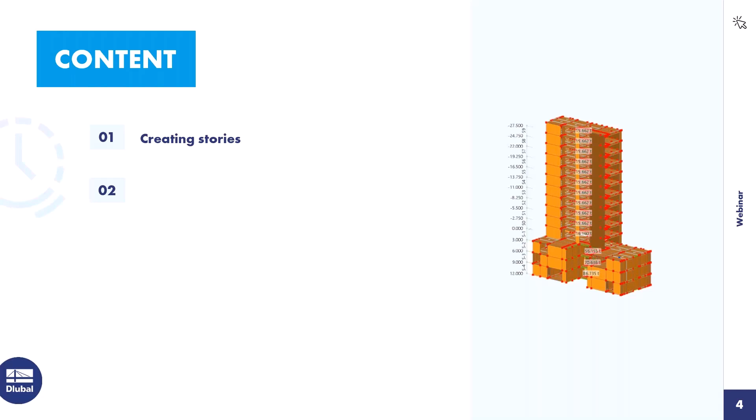Okay, thanks, Richard. What we are going to do today, I will tell a little bit about how to create stories with the building model add-on. I will show how to divide a 3D structure, the one you see here on the right side, into slabs and shear walls.

In order to understand how the building model add-on works, I will also explain comparing support reactions as load transfer. It's a little bit of a hidden function in RFEM 6, but in my opinion it is perfect for understanding how the building model add-on works.

Last but not least, I will show you the combination of the load transfer and the building model, because I chose this building that I'm using today since it's nearly perfect for showing the advantages of the building model add-on, but also of the support reactions as load transfer function, because it is smaller on the top.

So the nine stories here on top are smaller than the 3 stories at the bottom, and therefore it is recommended, in my opinion, it's the best way to analyze this bigger cantilever or balcony outside with this bigger area using 2D analysis. This way I can combine 3D and 2D calculations.

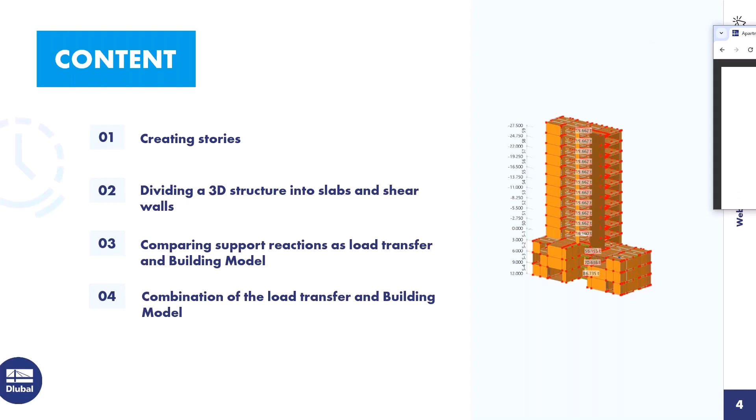Before I start to explain it via the software, via RFEM 6, I want to tell you just a few words about the project I'm using. You can find the project on our homepage. I did not 100% model it the same way for today, but it is adapted to this building.

It is in Amsterdam in the Netherlands, and as I mentioned, it is smaller for the 9 stories on top. It is completely made of CLT. That's already a difference to what I'm showing you today, because I'm combining it a little bit with concrete in order to have a hybrid structure.

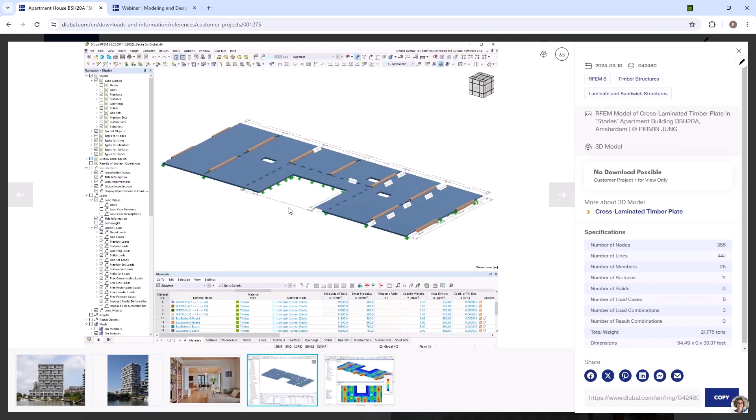Here you see the RFEM original model, and you will directly find out that the model I'm showing is a little bit different, but as I said, it's adapted to this. I used the same model in a previous webinar from the summer last year, from August last year.

You can also find it on our homepage under support learning webinars. It has the number 002965, and in that webinar I took a deeper look into the vertical load transfer and also the dimensioning with the add-on timber design. That is not today's topic.

Today's topic is only to look at how the building model works, how it works for stiffening the elements, how the load transfer works. This is the aim of today's webinar, and I hope I will be able to show that all to you. All right, now it's time to jump into the program. Maybe take a short look. Any questions so far? No, that's good.

So this is the structure. As I said, it's only the smaller part of the building, from story 4 to story 13, that has the complete height. This part of the building has a complete height of 27.5 meters. It has a length of 19 meters 20 and a complete width of 6 meters 70.

Maybe we also take a look at the ground floor just in order to understand how the building works. You probably did not watch the previous webinar, or not everybody watched the previous webinar. As I said, it is made of CLT. So I have 3 slabs of CLT attaching here.

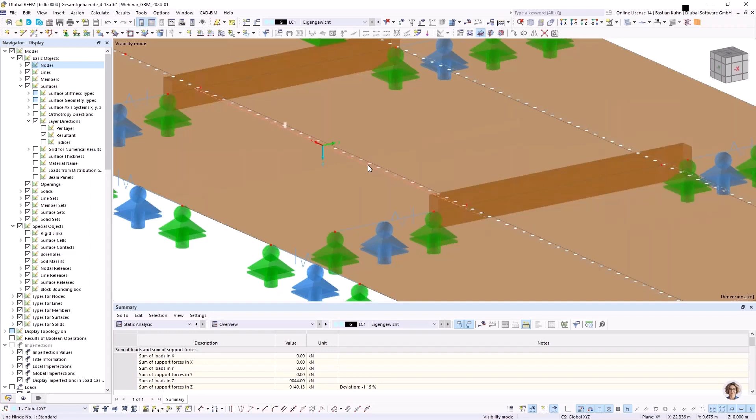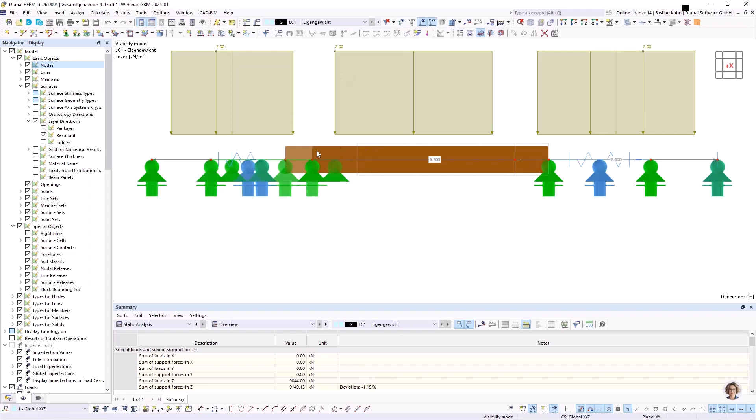And in order to regard the connection in between, I modeled here a line hinge, which is also in the original model that you can download in the customer project from our homepage, with the stiffness that I calculated, in order that the structure is not collapsing. Because obviously when we look in X direction, if you put a load in here and you have no support, no downstand beam, it's clear that this will collapse, because it's not moment stiff in this direction for this load behavior.

Okay, so this is the structure itself. You see that wherever there is a wall, there's a failing support underneath, which can only bear pressure contact, and I have a tie support at the end and the start of a wall, wherever a wall attaches. And here we have the concrete wall, which is quite stiffer, and here I have these walls attaching to it.

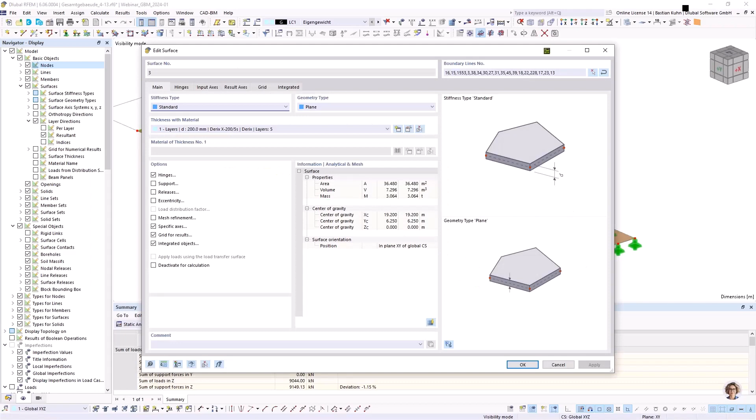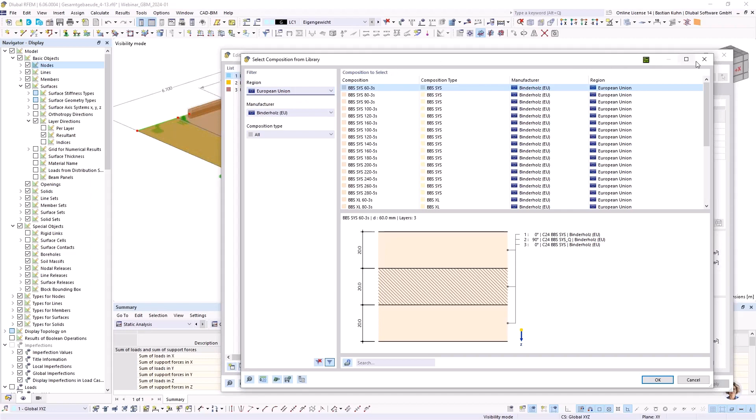Okay, just so that you know, the CLT plates that I used for the slabs I took from the database. And here in layers, I choose from a library. I chose Derix, but I could choose any other producer. It's possible to use producers from all over the world in here. And when we get to the walls, I will probably open that again, because there are some special settings that may make sense to introduce in here.

Okay, the load I showed already. Every story has a loading, in the first load case, of 2 kilonewtons per square meter, and I chose the wind load varying from the bottom to the top. It would have been possible, of course, to use our wind load generator, but I want it to be comparable with the 2D model that I want to show you afterwards. That's why I'm using the simplified approach.

Of course, if you go into the load wizard for wind load, such a building is always possible to calculate, and then you have 16 wind load cases in every direction, regarding eccentricity of the wind load. All these effects can be regarded, but it makes it harder to analyze the load transfer, and that's why I decided to use the simplified approach, which in my opinion is on the safe side and therefore good enough for this demo.

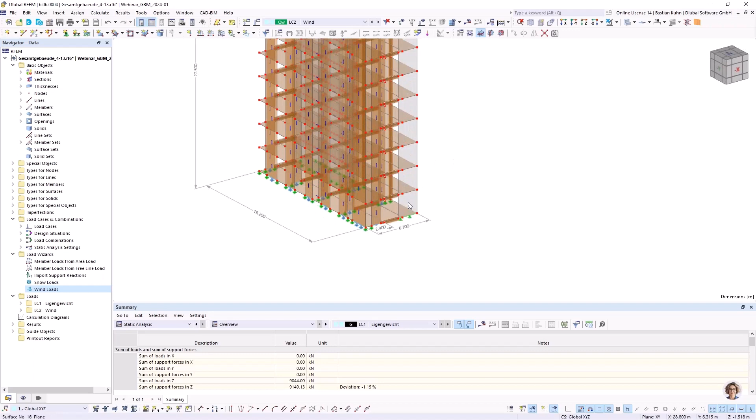Okay, I can switch off the load now, and let's take a look at the walls. Slabs we did. Maybe if I put this on and get rid of the nodes, it looks a little bit better. The stiffness direction: I have an option for the CLT plates to show the resulting stiffness, and usually for walls in CLT you always put the stiffness direction vertical, and on slabs you put it horizontal. That's what this blue check should tell you.

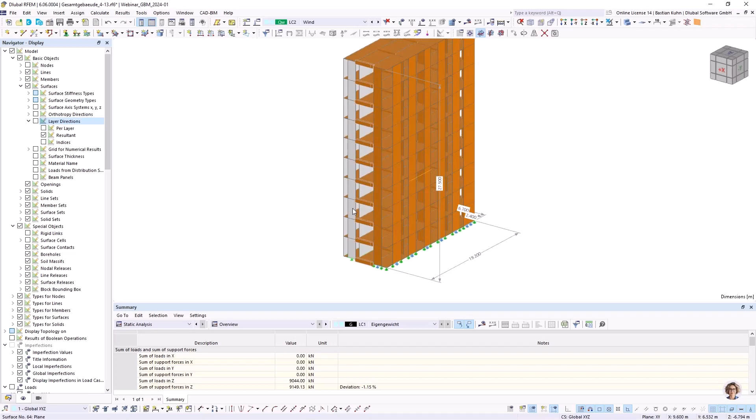Here is the already mentioned concrete wall, just to make it stiffer and to show you that it's not 100% related to timber. So the Building Model add-on is open for any material. And here is the staircase, and it's also concrete, and the walls are not connected to each other.

So the CLT walls, I said I want to mention the special function that you have in here. When you have mainly wall loading behavior, you should be aware to activate this design for failure of net sections. When we go to the library, there you will find an even better explanation of this. Maybe we can have a look at the, oh, it has to be on series calculation, stiffness. Let me take a look. I just want a simple picture.

Yeah, or maybe I'm not finding it. So maybe in stresses. Yeah, this one. You see, that's the torsional loading behavior, which is activated only if you have activated this check in here. So yeah, for the wall, that would be quite important.

And ongoing, the load transfer for the stiffness of a wall should, for CLT plates, always be reduced by a factor, in this case 0.69 for K88. And in such way, every wall is bearing force in here. That's the point. It would be possible to reduce stiffness or also to exclude walls from the load bearing, but in the model that I'm choosing in here, every wall is transferring the horizontal force from the wind from the top to the ground.

And when we get specific to concrete, if you want to regard cracking or loss of stiffness, there are several ways, a whole bunch of options, but one of the simpler approaches would be also to use stiffness modification. Okay, so this is the building.

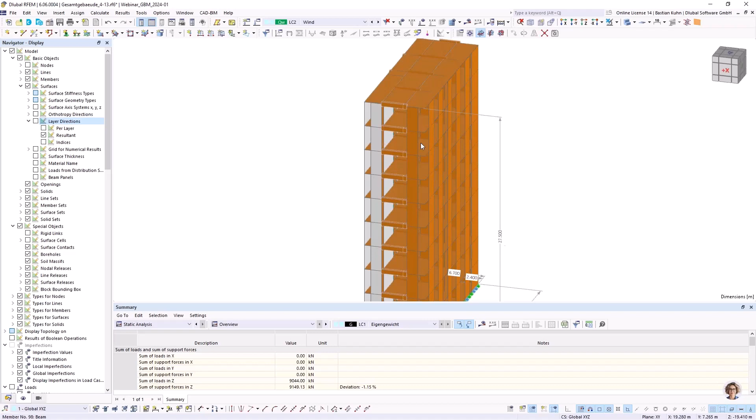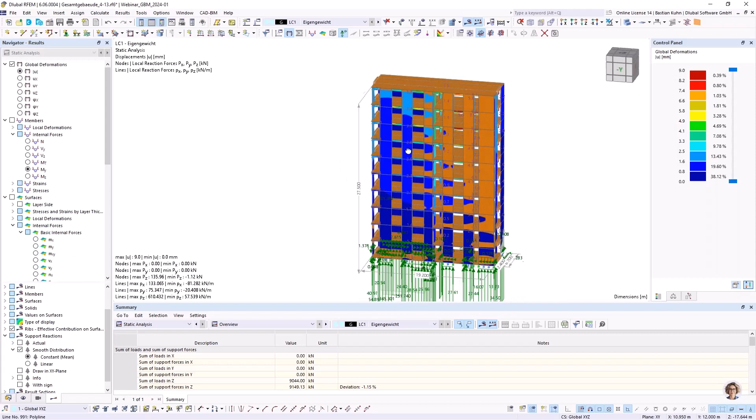In former times, before we had the building model add-on or this support reaction tool, customers always tried to calculate it this way. Let's say we have load case 1 with 2 kilonewtons per square meter, and we calculate it, and maybe we can remember just this little vertical force in here, 257. I can put it into my shortcuts also, so that we remember it afterwards.

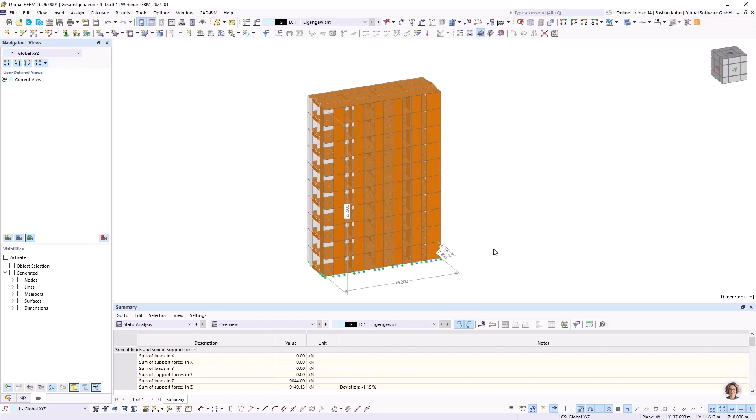But the problem always is when you calculate such a structure in this way, it is not the reality. In reality, such a structure would be assembled from the bottom to the top. And now you are calculating from the top to the bottom, which is, roughly said, wrong. And you should not do it, or you should find a way to regard settling of the structure during the assembly. And what if a stiffening element is failing or whatever? There are hundreds of things you should regard, and when you just calculate the whole building, it can become extremely wrong.

Okay, so now how would you do that? Of course, you can reduce stiffnesses, define line hinges and so on that I showed you in the slabs in the start. All these possibilities you have, but it makes the calculation very complicated. And this is actually where the building model comes in. So we will go to the building model, activate it, and change nothing else.

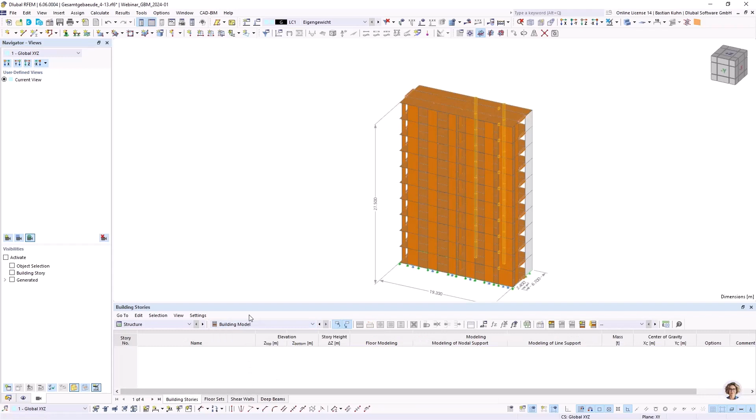And now that we did so, we have here in the structure, building model, 4 options to define building stories, floor sets, shear walls, and deep beams. We have the same functionality here in the data navigator, and as a first step we'll define the building stories. Okay, I will put on the rendering and activate rigid diaphragm. So the first story is already there.

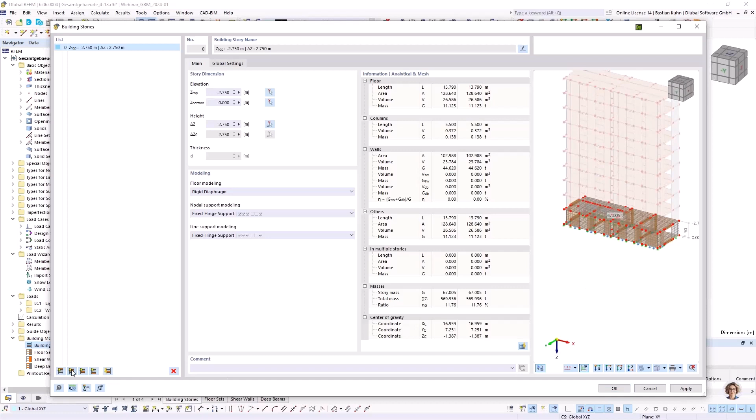You see, the software knows the first story is located from the origin 0 to minus 2.75. I can always choose any level elevation that I want. I get a mass. I also get a mass center. Obviously, where I have the concrete core, I have more mass, and that's why the mass center point is moved a little bit to the left side here, and afterwards it will also calculate a stiffness center of the complete structure. So okay, I will do this now for all the other stories. We have 10 stories in total, from story 4 to story 13. Here the top elevation.

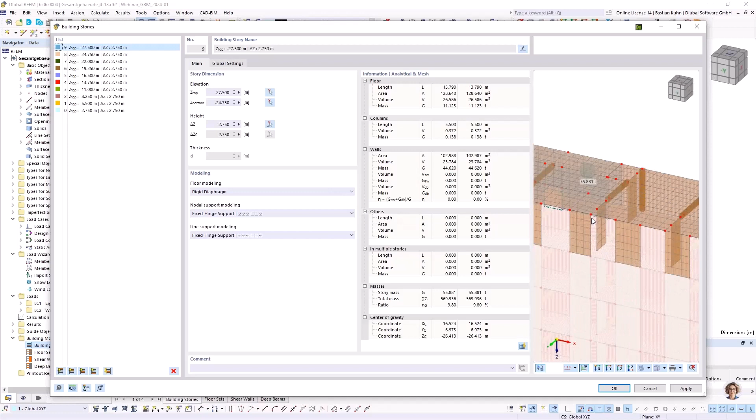And now for all these stories, in order to regard, for example, settling or creeping of the structure, it would be possible to define different nodal support modeling and different line support modeling. Right now, and also in the 3D calculation that I showed you at the start, every FE element has the stiffness of the material, E modulus, with the thickness. This gives you the vertical stiffness of it, E times A. And of course, as I said, this will not regard assembly effects.

And if you define an elastic wall hinge, for example, it will regard the vertical difference in stiffness, but also the horizontal stiffness of the wall. And that's actually what you defined whenever you calculated 2D models, in any software on the market, I think. And this is now possible to be regarded in this 3D model.

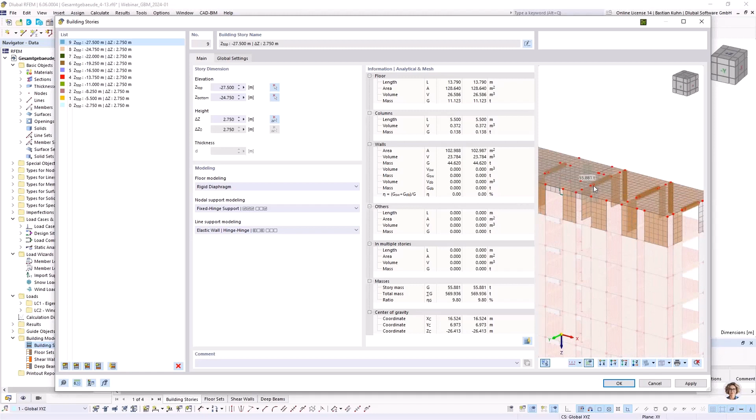So I would kind of call it 2.5D. That's what we're doing. We are calculating with the complete 3D building, but we're reducing it to 2D levels. We are dividing it into slabs and walls. This is what this add-on is doing.

All right. Global settings is something you can define whenever you want; story height modification is possible. Or if you say, because of my installation, I have openings that I maybe want to regard for the vertical load, but not for the horizontal, you can also ignore that. That may make sense and is a brand new function, which is why I'm showing it to you today.

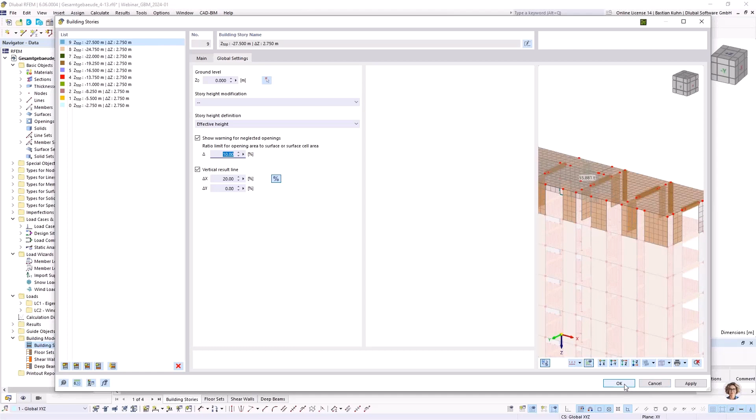Okay, now it's deleting the results. Of course, it's deleting the results. And apart from the mass, you see not really much in here. Not so much is happening. And you see, every story has its own mass. Of course, the ground story also has this bottom slab in here. That's why it has this higher weight. But that's actually it.

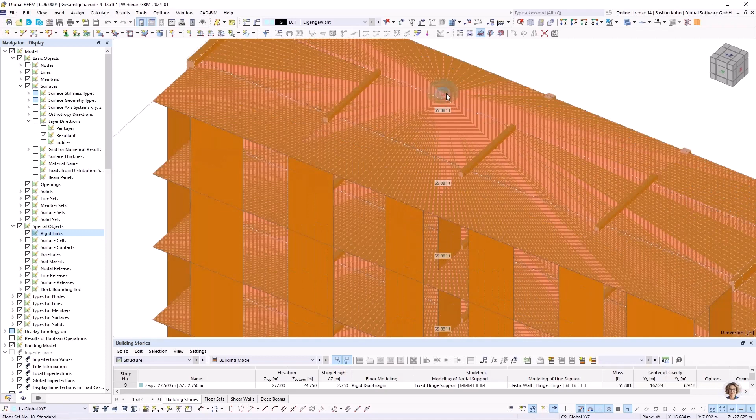But now when we activate the special object rigid links, I hope it gives you kind of an imagination of what this is doing. So you see from the gravity point, from the mass point of the structure, we have a connection to every FE node here. So in this way, we are calculating 3D, and as I mentioned, we have divided it into slabs and walls in here. I cannot go back; I should have shown it to you before.

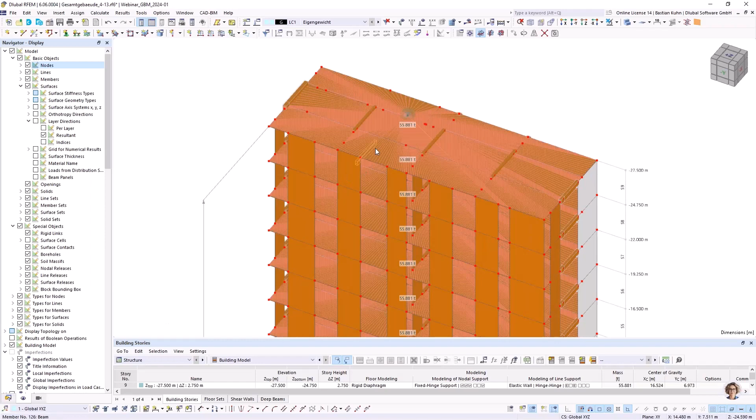But when we look at the ground floor, there the stiffness type of the slab is standard. And if you look at the stiffness type of the... wait, I will get rid of the rigid links again. If we look at the stiffness type of the surface in every higher story now, you see that it is transferred into a floor slab rigid diaphragm.

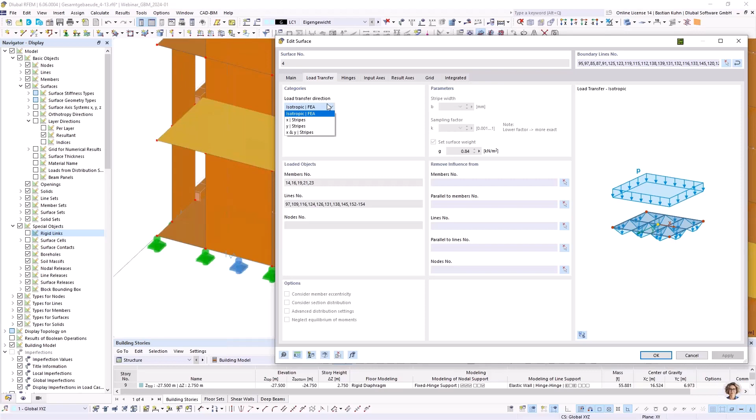So for the horizontal loading, for the wind load in our case, but also for earthquake, for anything that's working horizontally, 2D second order theory effects and so on, you will use this rigid diaphragm in here, just in the slab. And for the vertical force, we're using a load transfer. There's an option to choose isotropic and stripes. We will start with isotropic because I want to show you what effects you have when you choose stripes instead of isotropic.

Okay, so now this is done, and I would like to explain it only by the self-weight in here. Before we go to the wind load a little bit, I will also take a short look if there are remaining questions, but I'm pretty sure Richard will answer them all. Just opening them. Hold on.

Okay, so far nothing remained open, and you see now it has divided the force here and is calculating the first load case. And when this is done, when the force is divided and transferred to every story, it will do 3 calculations. That's quite an important step inside. Generating the mesh afterwards. I hope we can have it soon. Otherwise, we would take a look. Oh, wait, there it is at the 2D position.

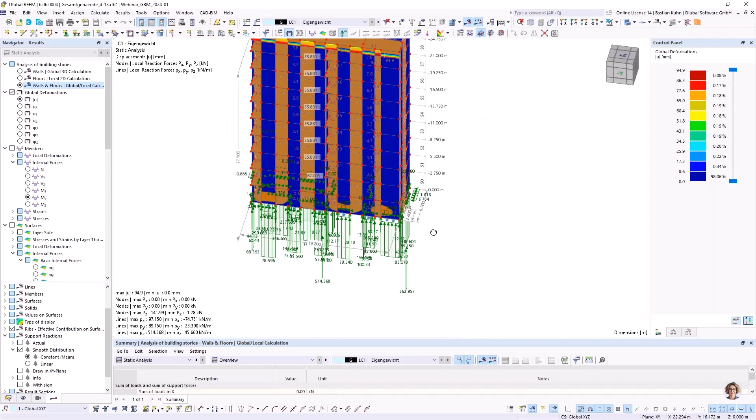So you see, there's a static analysis, the ordinary static analysis, a floor static, and a rigidity analysis of it. And if you have 3 calculations, it's clear that you also have 3 results for each load case, for each combination, for everything. So if you go in here, we have the results, but here you see that this is my ordinary calculation that I had before. Oops, maybe look at the side of it.

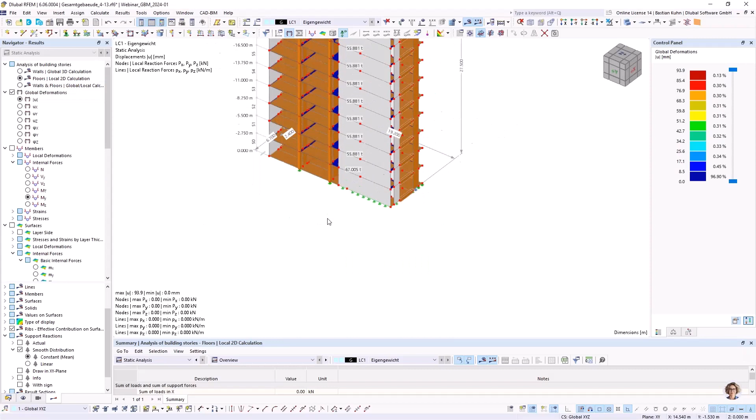So if we remain at the point that we put into the shortcut, you see that it is pretty much the same. Vertical load, it is 100% the same. But when we look at the floors in here, you do not have any vertical load, or any vertical support reaction. That's probably better said.

And here we have now only, oh, hold on. That is just a little bit strange because I did load it on every story. And to me, this does not look too good. Hold on. I think it's not connected inside here. Okay, there's a small problem that I'm facing that I don't understand. I had prepared the model before in a working version, and I would like to open this. I apologize for this because this is not the result that I would expect in here.

Okay, so here it is again. Sorry for this. And we now also have to wait again for this result. But as the mesh and the transferring of the load is already done, I suppose that I will receive better results in here.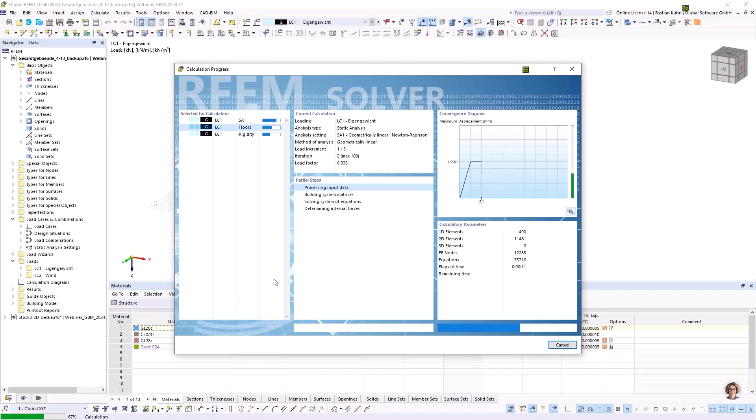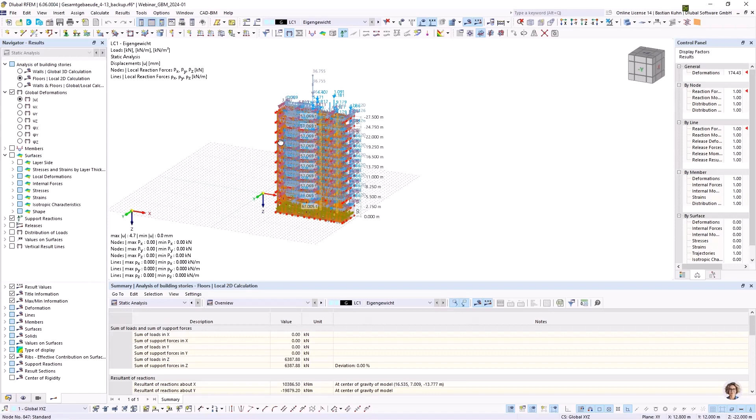There was no connection from the top points to the other ones, and so this was obviously not correct. I don't know, I will take a look at this later on. All right, so global deformation analysis. We look for the floors and hope that this is now better in here. Yeah, it looks way better. Yeah, perfect. That's actually what I wanted.

So you see now that I'm looking for the floors, you only have here, for the first load case, deformation in the floors and no deformation in the walls. The walls are in this global 3D calculation in here. And we will take a look at the walls in load case 2 afterwards. But right now we will take a look at the floors.

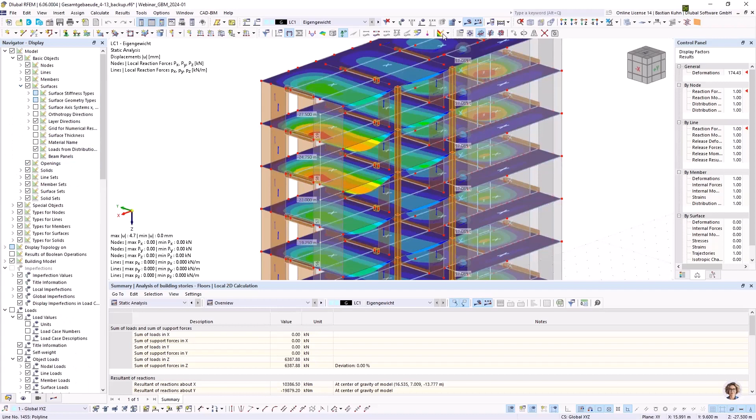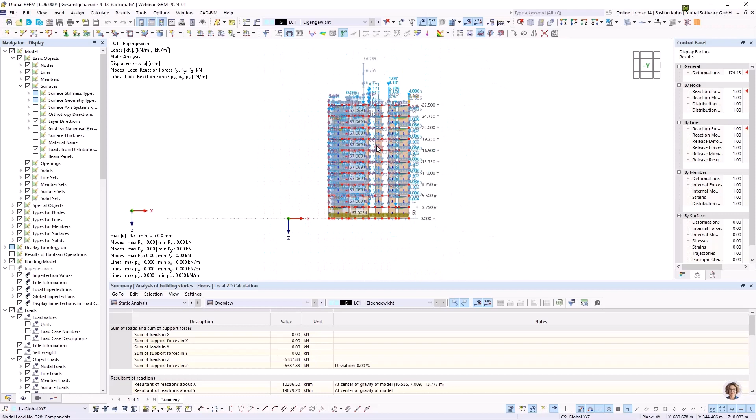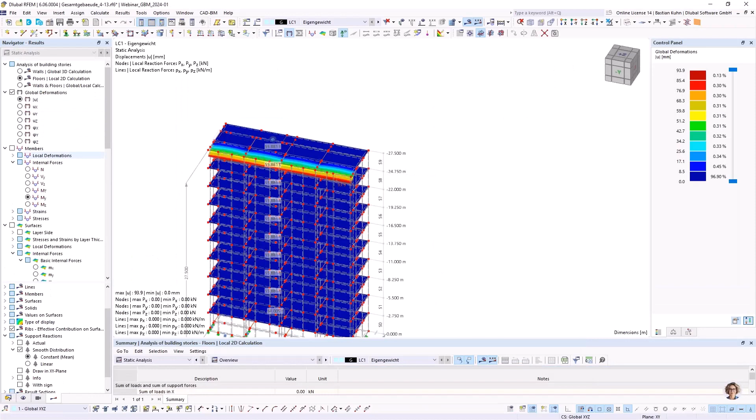All right, right here. Change these 30 surfaces and go back to the standard isotropic FEA stuff, and I will calculate only load case 1. Gives me time to take a look what the reason was that this is looking so strange. Maybe if I take a look into this, but this is all correct.

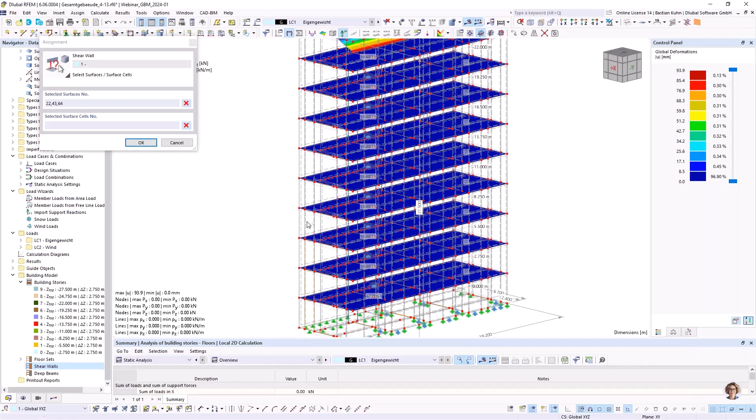And maybe I could also activate shear walls and deep beams. It's a function that is perfect for analyzing results, and maybe then it's connecting it correctly. Just to try for now till the calculation runs in the other model. Hold on. Okay. This is something you could use for directly defining reinforcement in here and also generating result sections. I will just show this to you on this shear wall in here.

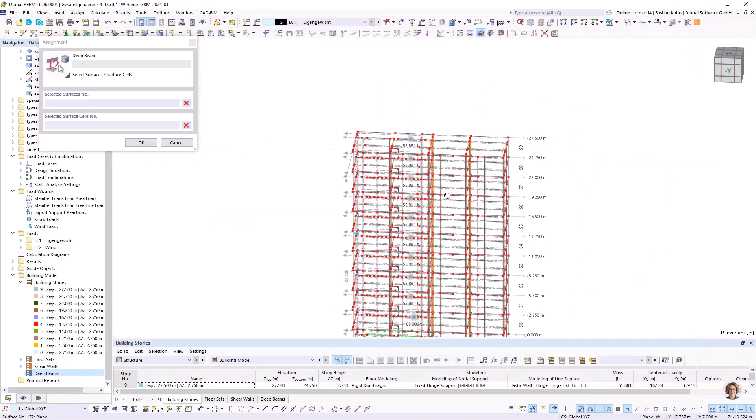All right, definitely good to delete the results here. And I also will define a deep beam where I have the opening of the building in here, where the staircase is. Therefore, I have to activate the surface sets because this would be good to be used by surface sets. So we go to surface sets, and we were using this here, and this can now be seen as a downstand beam.

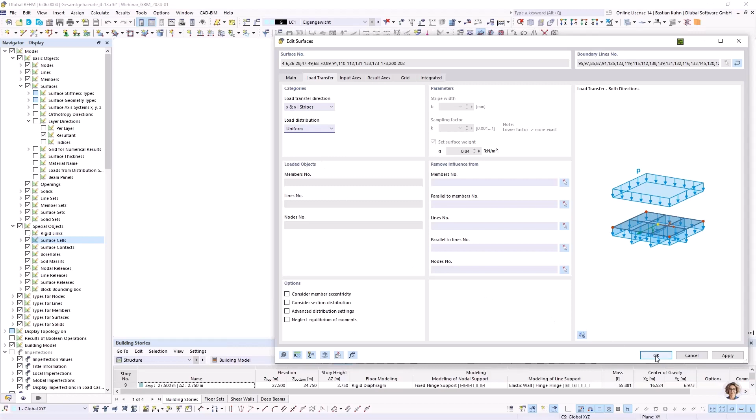All right, say okay, and also maybe generate a result section. Say okay, and maybe also use this function in here to use load transfer X and Y stripes right now. And here you see that's what I chose before in the other model that I showed you, it's possible to use uniform load distribution. And when it's not uniform, we can take a look now at the other models.

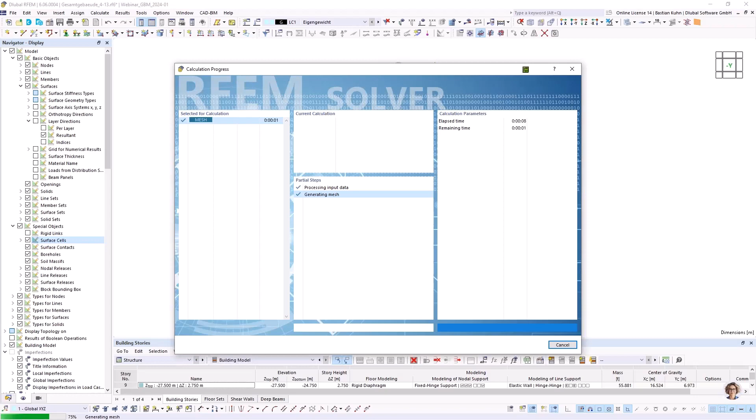I apologize, it's maybe a little bit confusing, because I'm now opening two instances of RFEM, which was actually not the plan, but is how it is now. Okay, in this other model, we are transferring also the mesh and have also already the result in here.

So this pretty much looks the same, but when we activate now the load, you can see it is now taken from the top slab to the slab underneath it. And you see now here, it is varying, which is not what we want. We want to have it constant here for our static analysis. It's what you always choose when you take a look at the support reactions. And here you also take them constant.

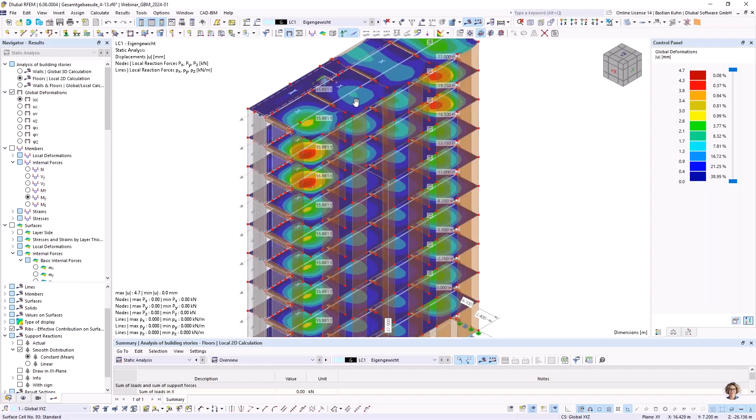Okay, let's just for comparison open this other one in here. Yeah, that looks now also better. So we can proceed with this. I don't know what went wrong there in the other model, but now it looks good, and we can go on with this. Okay, and in here we say now surface load from distribution activated. Get rid of the surface load.

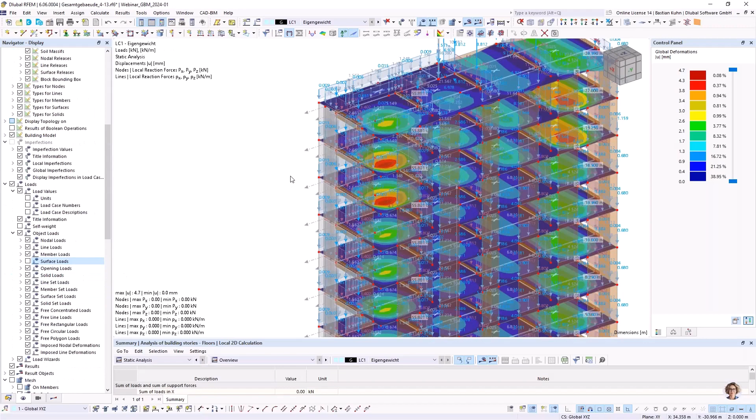And we are in load case 1, and you see it has here now a constant value of 6.8. Okay, I want to open now a second instance where I want to show you how vertical load transfer works. Doing this, we will calculate also the wind load in here and jump now to the other model.

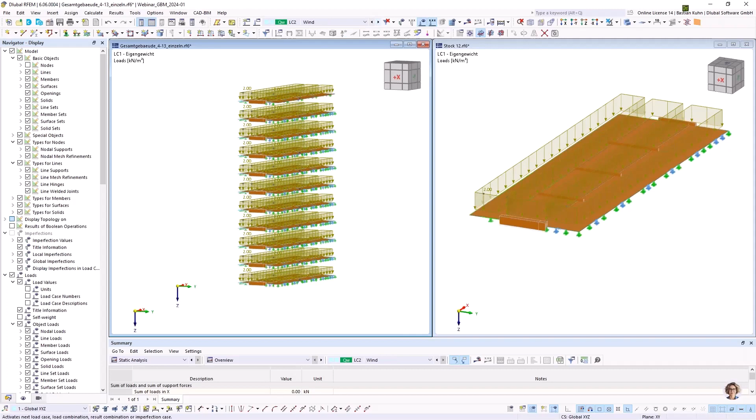This is a 2D model. It may not look like a 2D model, but it is, because everything that I did in here is that I just simply copied every story. There's no connection in between each story. That's from story 4 to story 13. With all the supports that you have in here, I have the same load. So load case 1 here, self-weight and wind. Again, also horizontal.

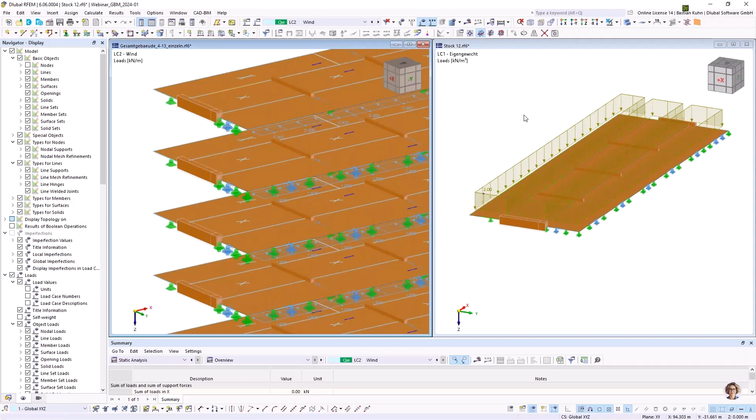And now, how would you do it in previous times to regard something like this? When you do not have the add-on building model, you would transfer the load from this slab to this. And this, of course, can be done via the function here, load wizard import support reactions. In here, you can go into the Dlubal Center and say, okay, I'm connecting my story 13 from all stories with this story 12 in here, and I can choose the supporting nodes, the supporting lines, and say, okay, please attach this force to this one.

And then, here it's the same as what we've had in the stripes and isotropic FEM method. Here you can also say I'm using uniform or varying, but at least for this webinar and for all the engineers that I know, they always want to use uniform loading. I myself also want to use uniform load distribution.

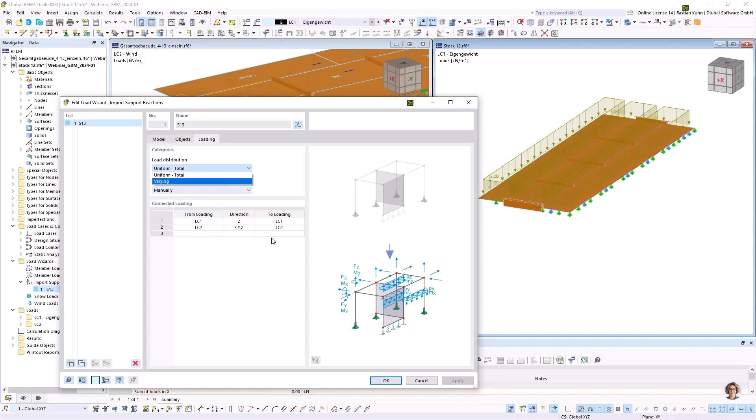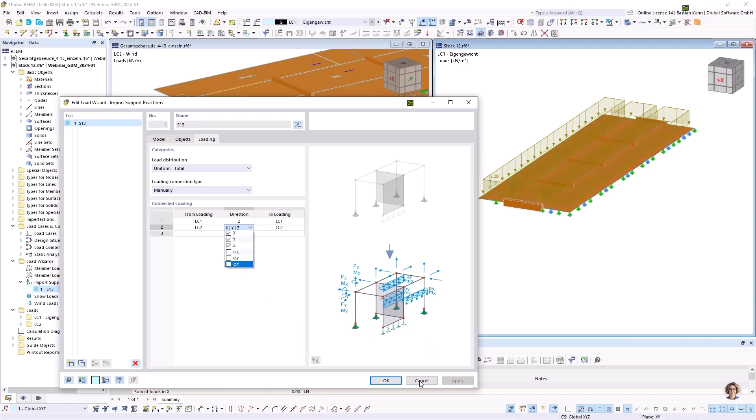And here you say, okay, I'm transferring from load case 1 self-weight to load case 1 in the other position. In this case, I only have vertical load, so I'm using only Z. And in load case 2, as I have wind load in there, I want to transfer all directions without moments in this case, because they are all hinged. I do not have any effects. And when you calculate this one here, do I have results? Oh, I have results.

And then, hold on, switch off. Also in this model here in story 12, I have self-weight and also horizontal force. Hold on, line loads. So you see they are here. And now when I look for load case 1, you see that I have here a value of 5.6, which is pretty much near what we have in the bigger 3D model.

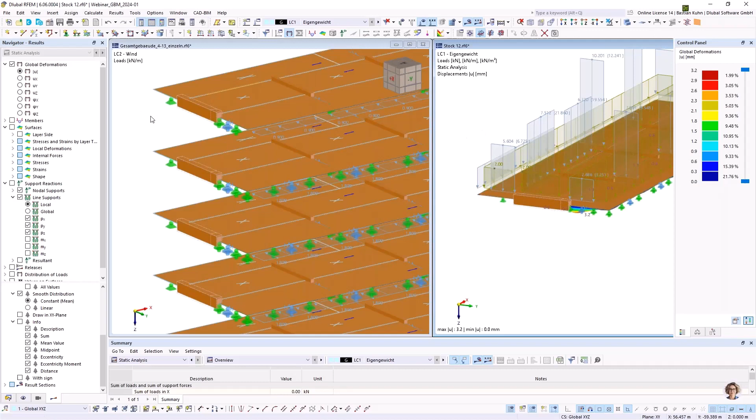And when we look for the results in load case 1 in here, you see that this value, 5.6 sum of loads, is the resultant here. And of course, you also have it on the story 12, 5.8, but as this is not regarding the load transfer from the top, this is already the error you are making in this 2D model, because you are not taking the force from the story 13 to the story 12. This you have to do in this separate position.

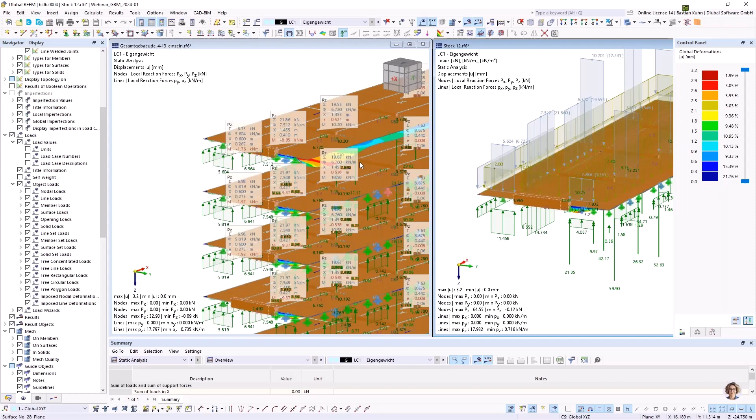Okay, and it can work the same way with the wind load. So when we take the wind load case, and maybe again we look for the stair case for the concrete kernel, we have here a horizontal force, and here we also can activate the info box and maybe only visualize this in here. This is now this and this. And when we look for load case 2 in the bigger 2D model, hold on, do the same in here. You see that 0.29 is the sum we are having here as well.

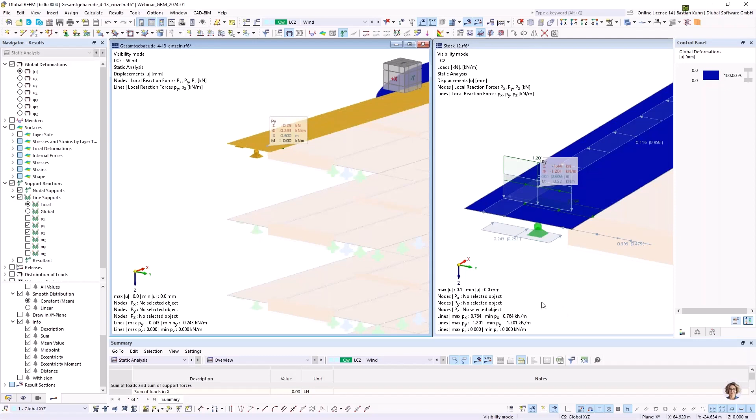So this fits, and now this is taking this as a load, and the resultant of the horizontal is 1.2. You have to transfer it to the story underneath, and so on. So you have kind of a 3D calculation in a 2D model, 2.5D. That's what I meant with this. A little bit hard to explain, especially now that I've opened several instances of it.

Okay, and here in this model where we are using the building model, this is now perfect for analyzing such bigger structures. When we take a look at load case 2 and the wall, and maybe also the resultant, that would be something where the shear walls that I defined play quite a big role, and we're looking at section 1 and 2, because you see that in here you have the horizontal force of 5 kilonewton in total that goes through the wall, and here it is introduced as a new loading to the story underneath. So this is how the load transfer in this add-on works.

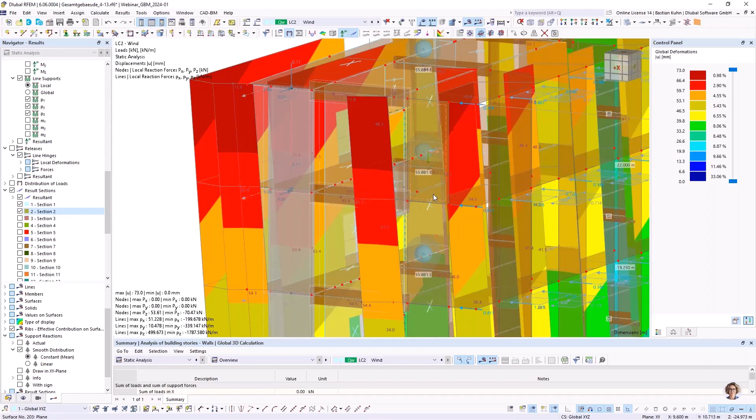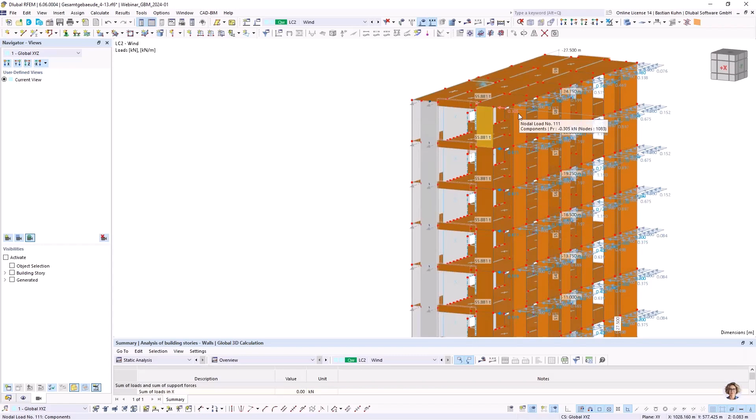And how you define the shear wall is up to you. When I'm saying, okay, this wall in here, for example, I don't want to bear any force, you can always deactivate it via the structure modification, or you can reduce the stiffness of it. So this would all be possible, but it is in this 3D calculation, and you are looking at it only in 2D, on slabs and walls. So this is how you would do that. Okay.

Okay, I hope I explained that, and as there are no questions, I think I explained it correctly, or you understood correctly what I wanted to explain. Let me take a look at my notes to see what is missing.

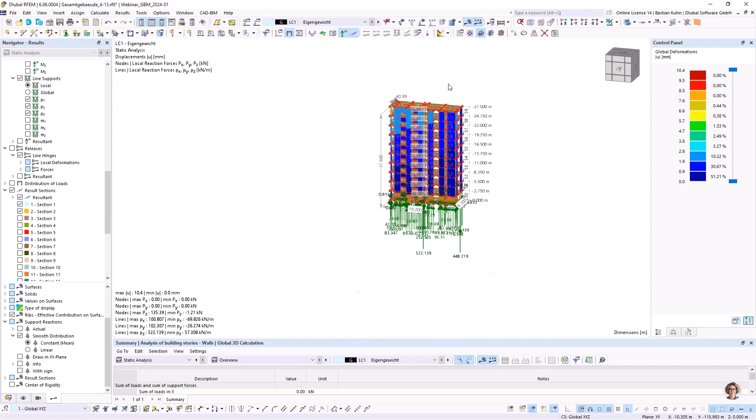Apart from how the load transfer works, the building model add-on gives you a lot of other functions that I'm summarizing here. So I would switch back to load case 1, switch off the load, leave results on, and we can activate the center of rigidity.

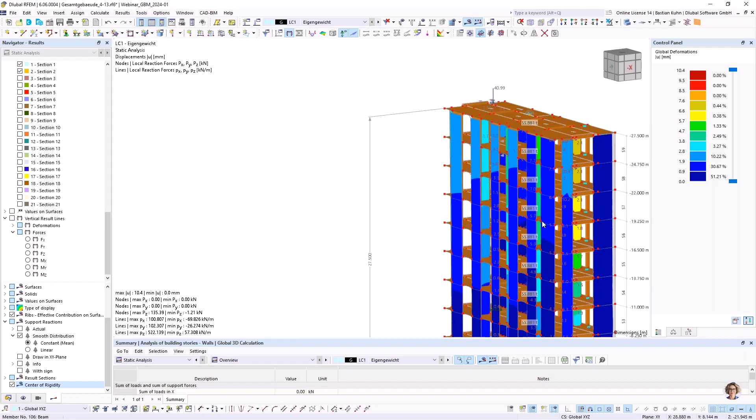You see the mass center is right here where the staircase is with the concrete, and the stiffness center is different since this is also a concrete wall, and I have a lot of walls here and in the center of the building on this side, so there are more walls working in horizontal direction. On this side, my stiffness center is moved to this point.

This is something relevant when doing a dynamic analysis, which would also be possible with this add-on. It would regard your eigenvalue analysis due to the response spectrum method, and you would get the force in every story. You could regard torsional effects by introducing load on the stiffness center, because if you introduce the load on this point via the eccentricity to the mass point, you can regard torsional behavior of the structure perfectly. You have that in each story, here, here, and here.

This is one of the advantages of the building model. We have vertical result lines, so you see graphically the horizontal force. When you activate it, you would have it.

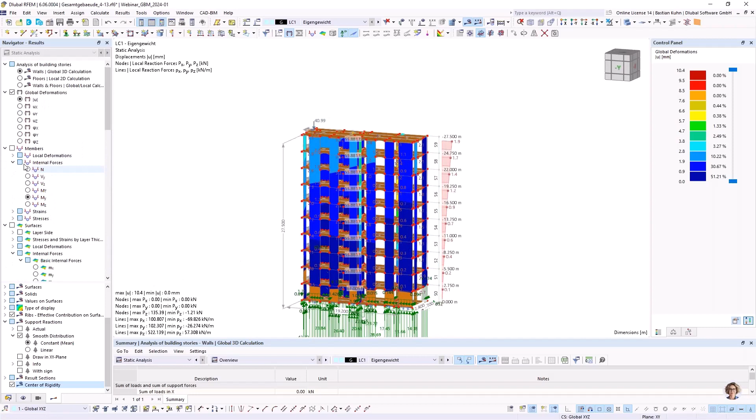Here, this one, this one, this one. So you have the horizontal force in here. On the bottom, you see the complete force going through the whole building, also something you would need for the dynamic analysis.

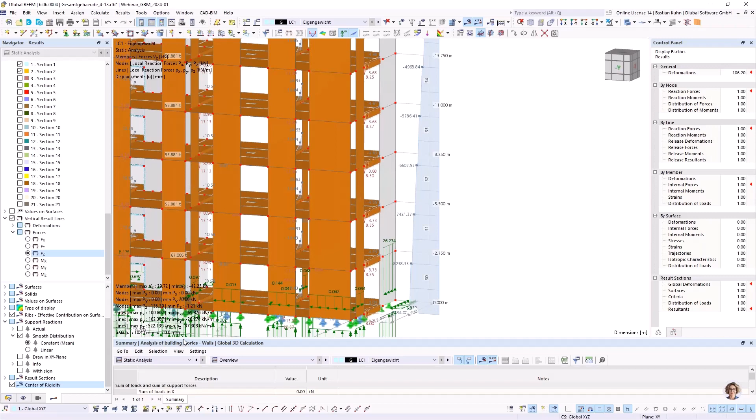Then you have an output via columns for the results of every story. You get X and Y coordinates of the rigidity and mass center, and you get the interstory drift in each direction between each story, also something you need to calculate with quite a lot of effort when using the 2D approach I showed in the other model.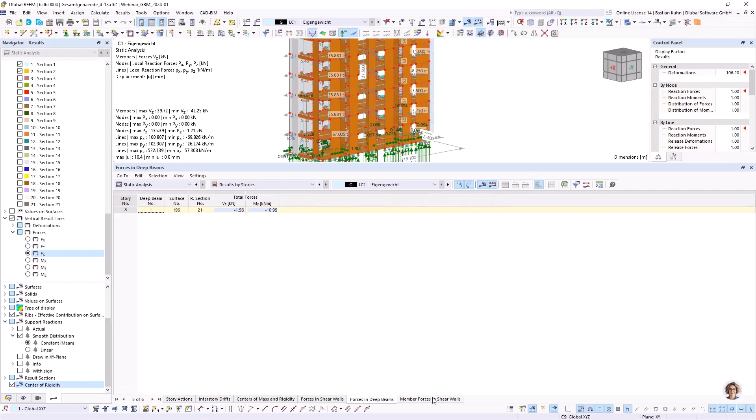Where I defined the shear walls, I did it only exemplarily on this vertical wall here. You have directly, instead of forces in a surface, member forces that you can use for further analysis. You have the same for the deep beams, and again for the shear walls. You have sections where you can work with all these points, you can take a look.

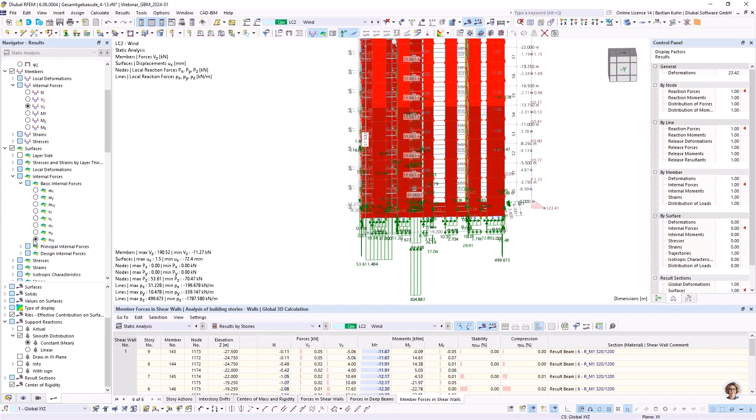Maybe let's go back to load case 2 again, for the wind, and activate the shear force in the surfaces, NXY, and now we're only looking at the walls. We have quite a high NXY right here at this point. Maybe if we hold on, can I attach it? Yes, for sure I can.

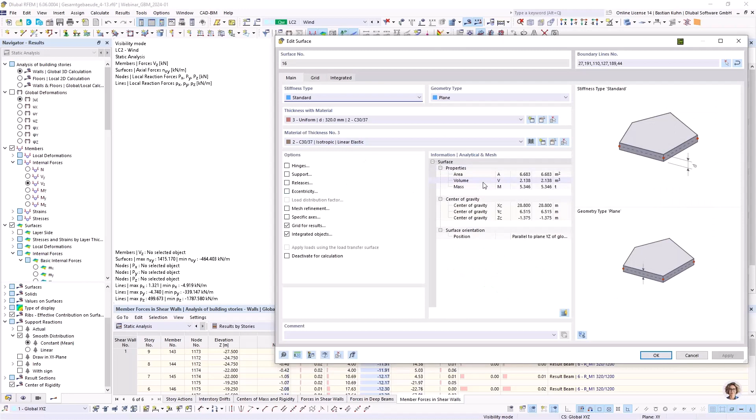So here, and say visibility by these objects. You can see, okay, load transferring, as I already mentioned, is done by the surface itself. If you model it to have a reduced stiffness, as if this were a CLT wall, it would include the reduced stiffness. If you have defined a line hinge here, that would be regarded, but right now I did nothing with it. It's using this shear force in between, and that's the result I have.

Of course, I can always have my shear force integrated here via the result beams. This is also done automatically by this building model add-on. This is the advantage, let me take a look, I probably have missed some points, but I can't remember them now.

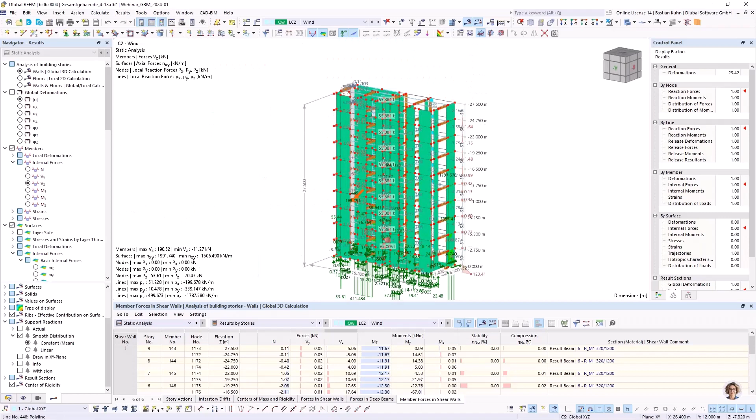Yes, one thing. If we cancel the visibility mode and take a look at the floors again, you see an effect: NXY in the floors is nearly zero, even though I have such a high horizontal deformation. Why is it the case? Because I'm calculating only 2D for the vertical approach here. If I go to the walls, it's different.

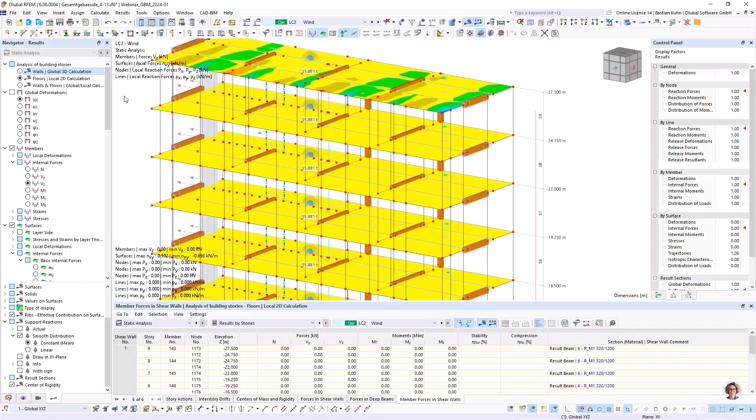All right, then whenever you have used visibilities, it's also nice that the building model add-on calculates or generates stories for you, so you can always say, okay, I'm activating story 9 and story 1. You always have it directly automatically generated and can work only in this specific story. So that would also be possible.

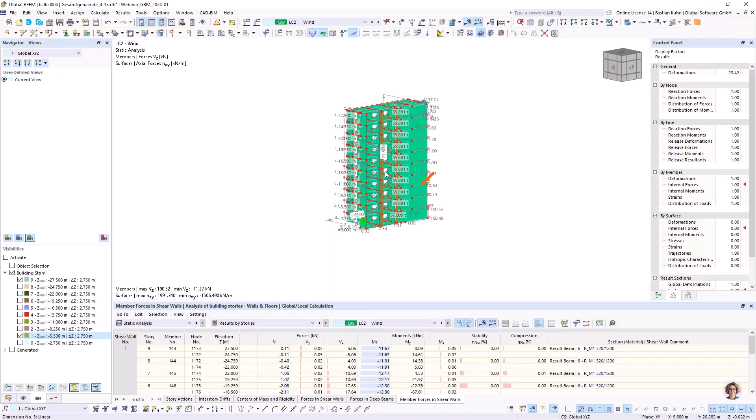I think that's all I have to say to the building model add-on. Now the last point I want to show you: if we go back to the homepage and look at the building, there's such a point, a critical point, where a smaller building attaches to a bigger structure.

It's probably necessary to do a deeper analysis on this special point. How could you do that? In my opinion, the best way is to combine or transfer the results from this big 3D model to the 2D, so I choose this one. This is the original building or original structure, similar to what I showed you, but it's way bigger.

If you don't trust me, I can show you here, it has a higher length. Okay, yeah, it's longer. You can see it: the original building, from story 4 to 13, goes from this point to this point and has this width.

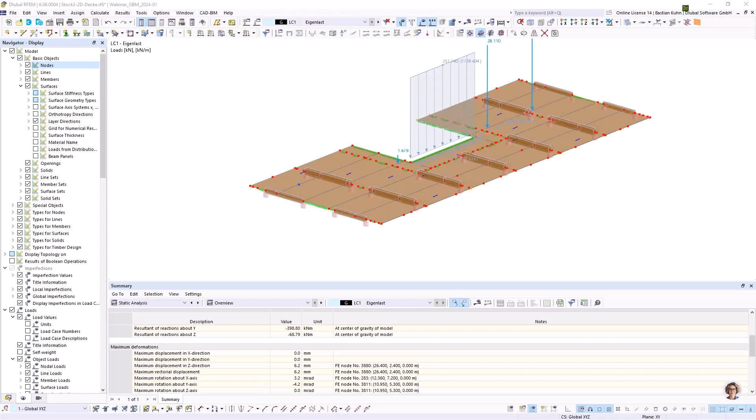Now if we remember the resultant we should look at when we started, I just move it back in here, 257. That's the value we want to have. It is always possible to combine the results of a building model add-on with import support reactions, and that's nothing else than what I did here.

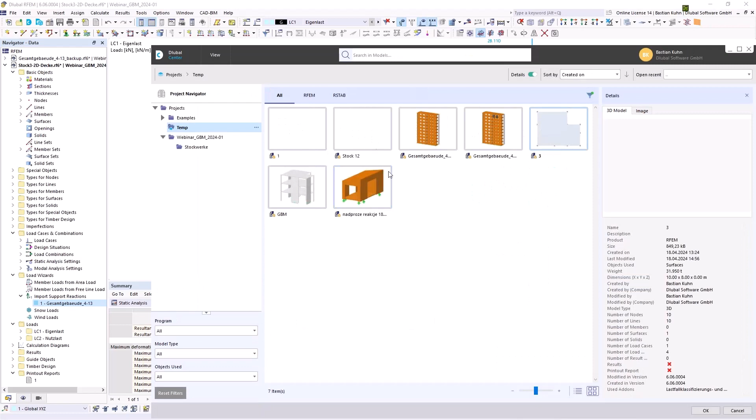I choose the connected model in the Dlubal Center, say okay, just for the demonstration today, use this number 1553 and transfer it to line number 56. And again, transferred here. So you can see that this is now, again as a demo, transferred correctly to it.

Okay, maybe a little bit confusing, but I hope you got it all. Otherwise just give us a call and we will try to show you that more in detail, and hope you can see the benefit that this add-on will offer you. And I give the word back to Richard.

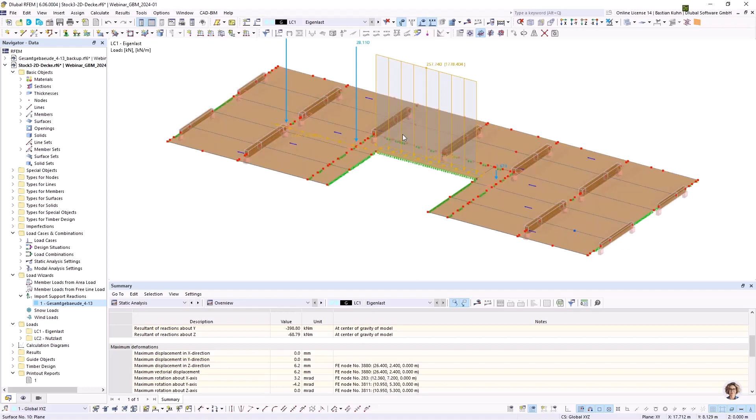Okay, then can you give me the display? Sure, yes, they will. Okay, moment, then I hope. Confused by the video? Oh sorry, I can switch it off, no problem. Wait, I hope you can see my display now. Right now it's green. Okay, I hope. Yes, the PowerPoint.

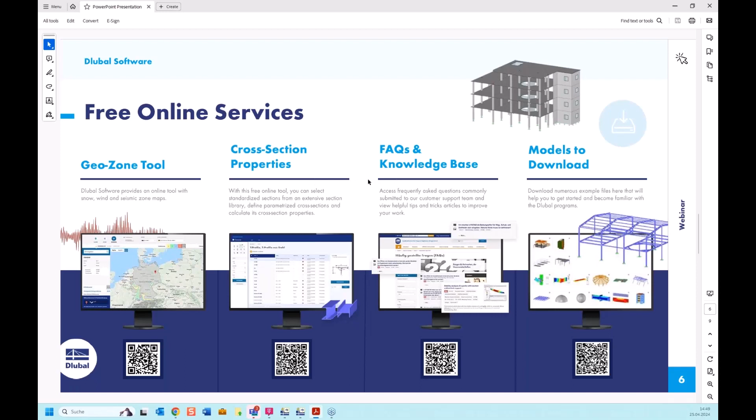Okay, then I want to show you other free online services on our webpage. For example, the GeoZone tool. Maybe I can switch on our homepage here under products, GeoZone tool.

Oh, I hope it opens. Or, not logged in, okay one moment. Okay, again, GeoZone tool. Okay, I need to click there.

For example, you want to know the snow and wind loads from London. You can switch or get information about the load zones and see the values. Yeah, that's one of our services.

Then also we have a big assortment of tables of cross sections, FAQs and knowledge base about our products, and models for inspiration you can download.

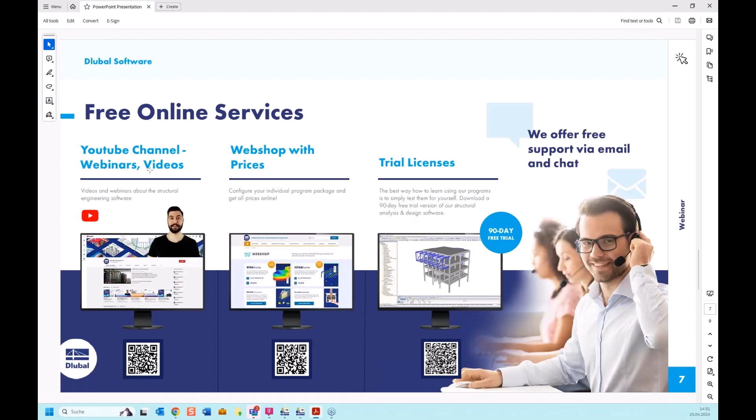This webinar will be recorded, and you can find it again under news, events, webinars. Let me find it, where is it? Somewhere here, and there you can click and find our PDF document and the webinars. There will also be a link, or you go to our YouTube channel and click here to subscribe and get information about the newest videos.